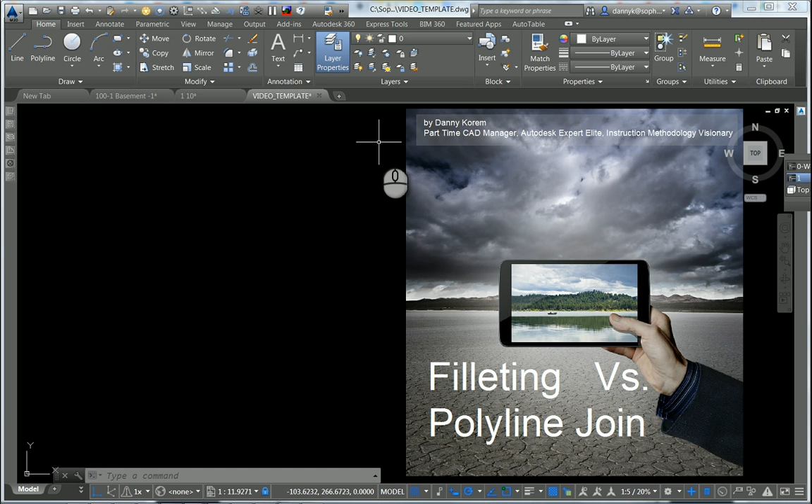In this video we're going to discuss filleting versus polyline join. We'll start with some simple examples and then move on to more complex examples. On our way we're going to explore some things and learn some tips and tricks.

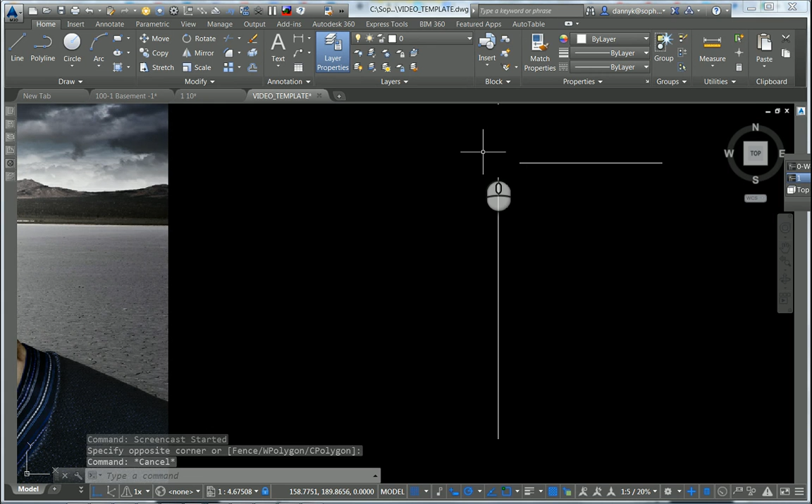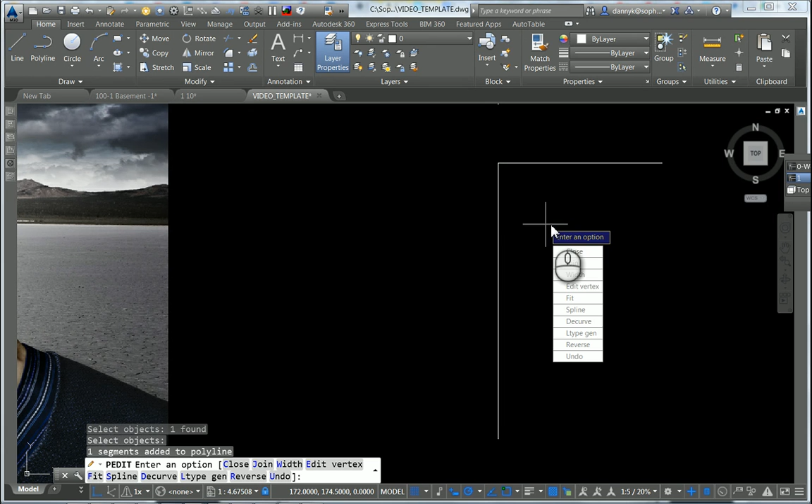So let's get started. I have two lines here which I want to convert into a closed polyline in the shape of a right angle triangle. So the first thing to do will be to fillet those two at the 0 radius so they share a common endpoint right now. The next thing to do is to PEDIT one of the lines, turn it into a polyline, and then join the second line, and at last close, and we gain our goal.

A much more interesting way to do it with fewer clicks is directly PEDIT, but instead of selecting a single polyline or a single line, I'll opt for the Multiple option by pressing the down key and selecting the multiple selection.

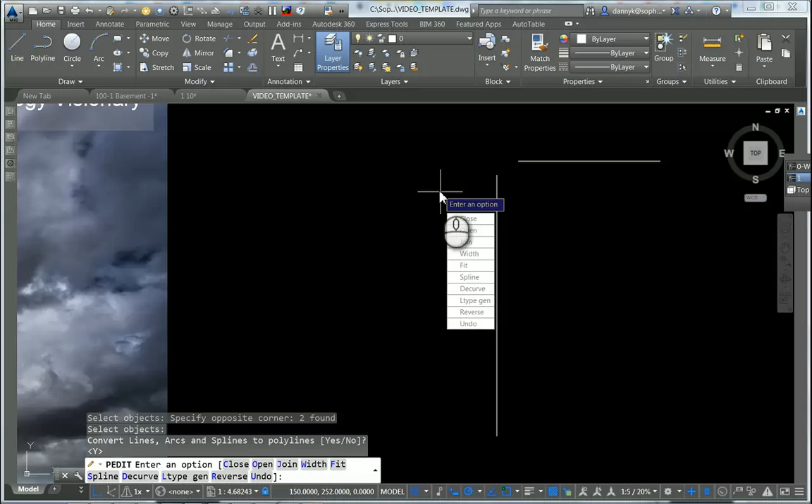Select both lines, turn both into polylines, and try to join. I'm prompted for a fuzz distance, so I'm going to click both endpoints, the first and the second, and I have a touchdown. Now I'm going to close, and again I finished my job with fewer clicks.

This line work here reflects much more our everyday routine work, so we're going to check exactly what we have here. We have a pair of polylines and a pair of lines over here. The best practice while filleting is to first select the polyline and then the line, so the line is directly connected to the polyline, like so.

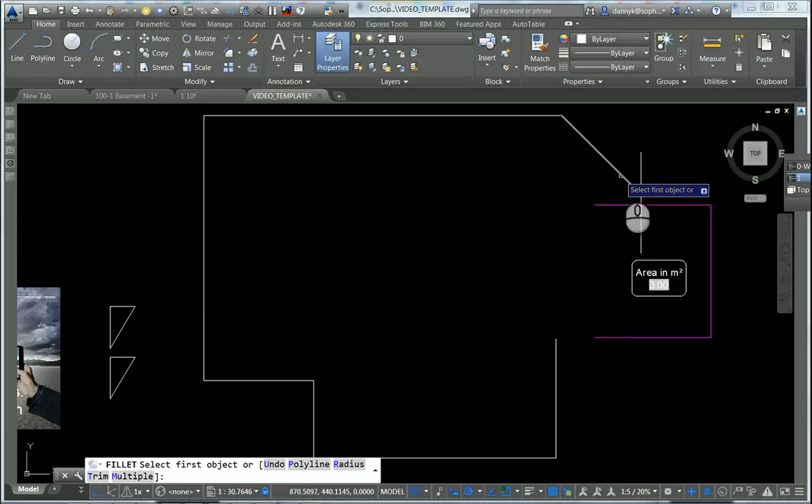Click on fillet, select the polyline and then the line. Now the line became a polyline segment, and again first the polyline and then the line, so we have a nice polyline here and everything is okay.

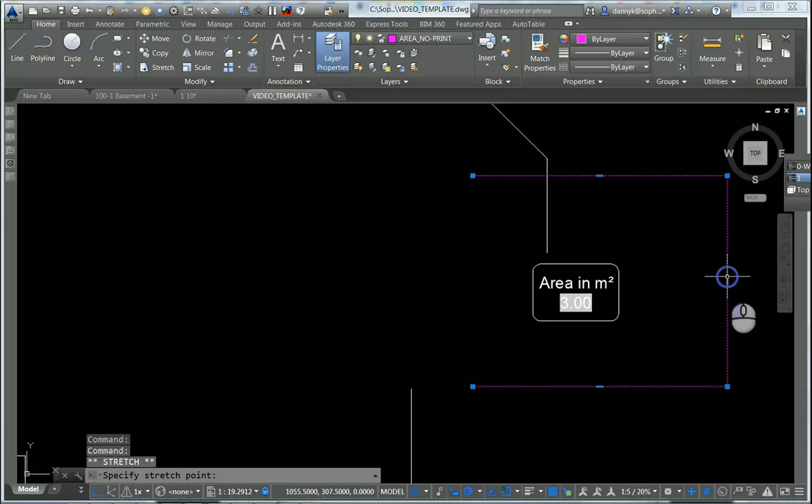This polyline over here is much more interesting because it is connected to this block, which has an attribute whose value is quoting the geometry over here. That means that if I change my geometry, this will be reflecting the area of the magenta color polyline.

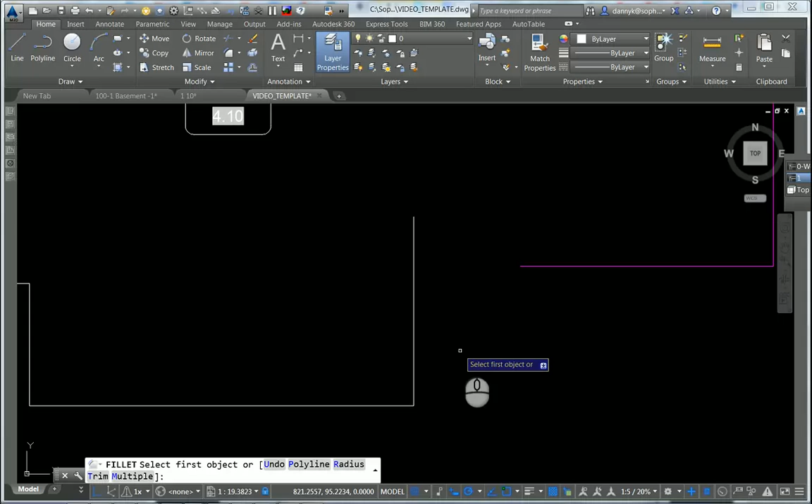I'm going to move this from here to here, and I'm going to place my block somewhere over there, like so. Now some trial and error. If I first select the white polyline, the magenta one will be inheriting the white one's properties.

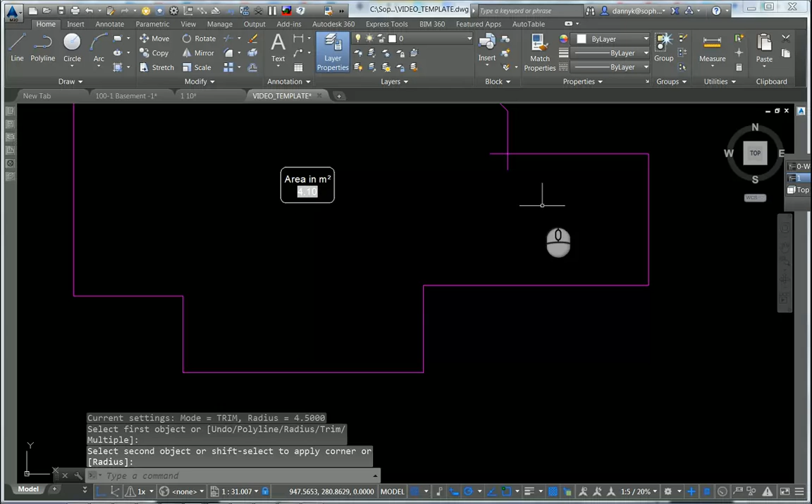So I'm going to stop the command, cancel everything and start over, but this time I'm going to first select the magenta color polyline. So again, fillet 1 and 2, and 2 and 1. The order now is of no importance.

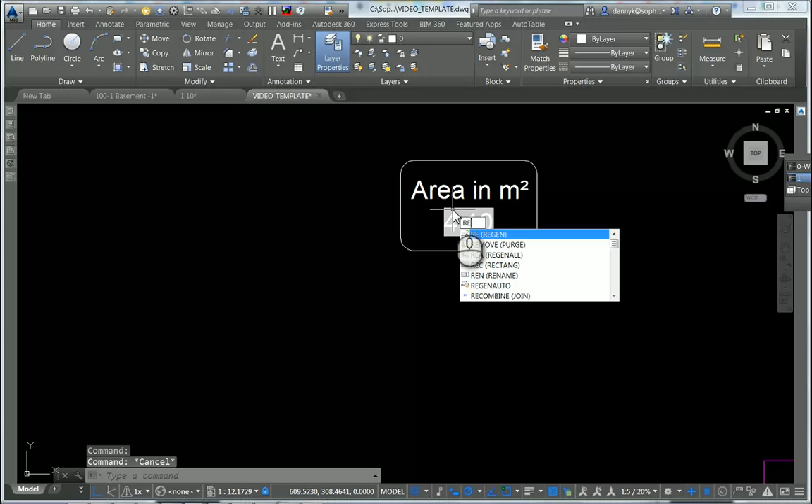Now if I touch my closed polyline, I can see that it has an area of almost 29 square meters. I'm going to check it right here by regeneration, like so, and everything is just fine.